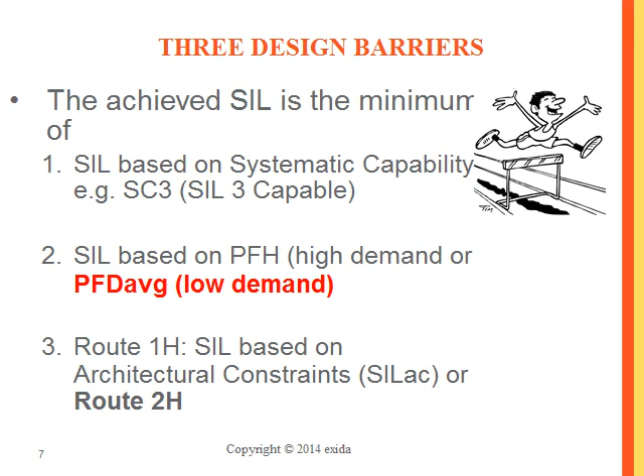Now, we will be looking at the probability calculation for the PFDavg in a low demand safety application where proof testing can be used. Okay? In calculating the PFDavg, there are 9 key variables to consider. The 9 variables are failure rates of each product, including the failure modes, and any diagnostics coverage from automatic diagnostics. And we're actually going to be touching a little bit about that. Redundancy of devices, including common cause failures.

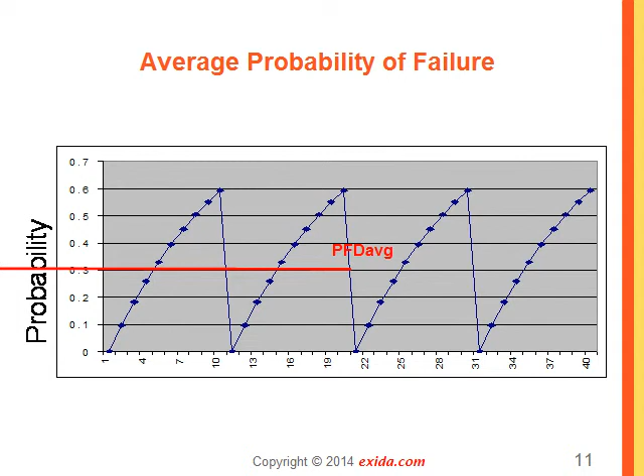When a condition or demand occurs infrequently and is an independent event, you really have no real knowledge of when it's going to occur. The average probability of failure is a valid way to represent failure to respond to a demand. Okay, so if you don't know where it's going to happen, you have to assume all points on the sawtooth graph and find the average, and that's where your PFD average is going to be. Okay?

Now, if I run a functional test and I see the system respond, do we know that everything we need to work really does work? Do we even care? If everything seems to work perfectly, is there a problem? I mean, we all say, this test seems perfect to me, and we move on, but really, is everything tested?

A proof test is done where, let's just say, a pressure sensor is isolated and pumped up such that the pressure sensor exceeds the trip point. The remote actuated valve is observed to verify that it moves, right? Well, let's ask the question again. Is everything tested?

Well, here's just 4 examples that I came up with that a proof test might not cover, that people might not think about. The valve seat, it may not seal properly. If the response time is not measured, component failure may be causing the speed of response to exceed the process safety time. Process connections to the sensor may be failed, or power supply, the droop wire resistance, may be limiting maximum current, disabling diagnostics alarms.

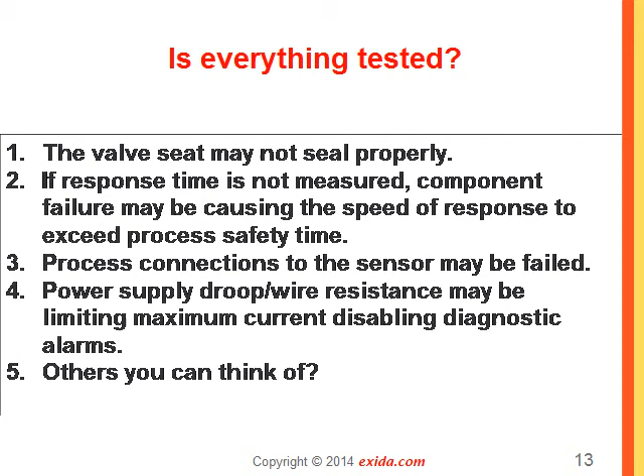And I listed 4 here. There's many more that I could probably list. But what are some others that you could think of? Are you really testing everything? Is it 100%?

Now let's take a look at an equation of a realistic proof test. Now here's a very simplified approximation showing that we have an estimate of proof test effectiveness, the CPT there. Once the time interval and the mission time are determined, you can begin your calculations.

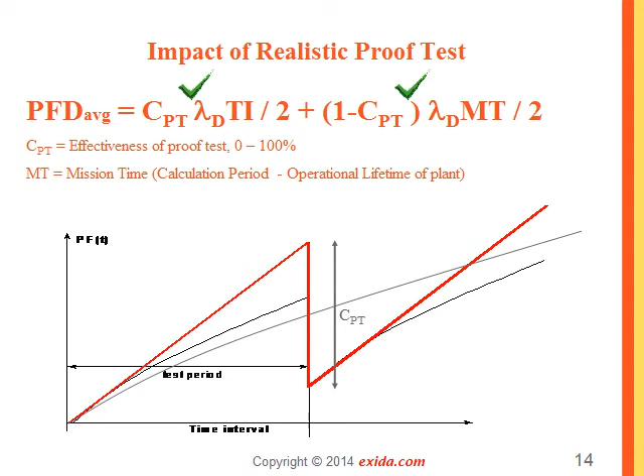The formula for the initial part of the equation, the λDU, this part simply gets divided into the part that's detected during the proof test, this first term. I'll put a little check mark here. And the part that's not detected in the proof test, which is over here. That's how you calculate the proof test. This approach gives you a good average over a given mission time. And like I said, we'll go into more details in the next coming slides.

Now, it can be clearly and definitively proven by an example that no real proof test is perfect. We have many examples of failures in products that cannot be detected by fundamentally simple functional proof testing. However, you will still find people that say, hey, if it works, it works.

It's surprising to see some of the proof tests and how minimal, rough, we can even say crude they are. Like the example I spoke about 2 slides ago, there was a basic proof test that instructed the user to put a block on a valve and, well, let's check to see if the valve attempts to move. The issue here, and we've talked about this before, you have no idea if that seat actually seals or not. This proof test is far from perfect. And yeah, that's a pretty basic example, but I'm just trying to build a picture here.

What happens if you have an imperfect proof test? What's it look like? Instead of taking the probability to 0 during each proof test, we can take it to some finite value above 0. Let's say, you know, right here.

As you can see, the probability grows and grows as a function of the number of proof test cycles, and in this case, is totally equivalent to mission time. So you can see here, as it grows. Okay? Now look at the black line, the PFDavg line. I'll put a little check mark there. That is for the number for just one cycle.

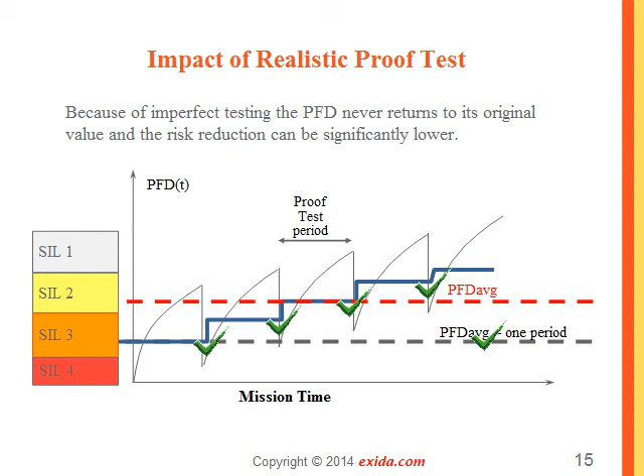Okay, as an example, let's consider a high-level protection safety function. The proposed design, let's say, has a SIL 2 target, and we've chosen a SIL 3 capable level transmitter. We've chosen a SIL 3 certified safety logic solver, and a single remote actuated valve consisting of a certified solenoid valve, a certified Scotch yoke actuator, and a certified ball valve.

Now, some people say, well, why did you choose all that certified stuff? Well, now we don't really have to worry about the systematic capabilities, for this example anyways. We're going to use exSILentia, the SIL verification tool, but we're going to enter variables that are very idealistic, okay? Which basically means very unrealistic. But just for this sake, let's just go through the example.

We're going to choose a mission time of 5 years, 1 year for the sensor and the final element. We'll have really good automatic diagnostics, we'll say. We'll do a 100% proof test, which is commonly used, but very unrealistic. And we will assume the proof test is done with the process offline. If it's not online, there can't be a PFD because, well, there can't be a demand. That eliminates the whole worrying about bypassing.

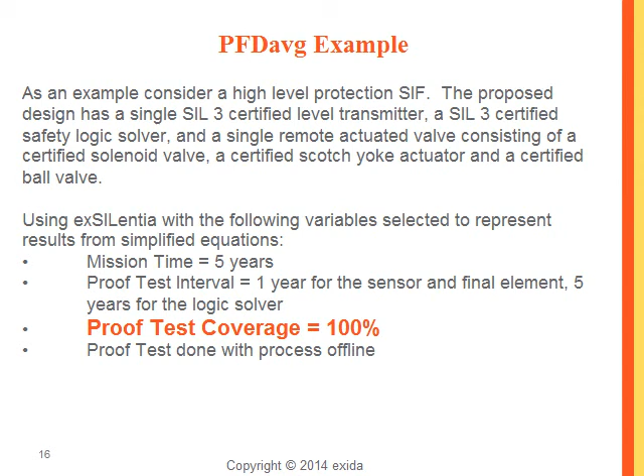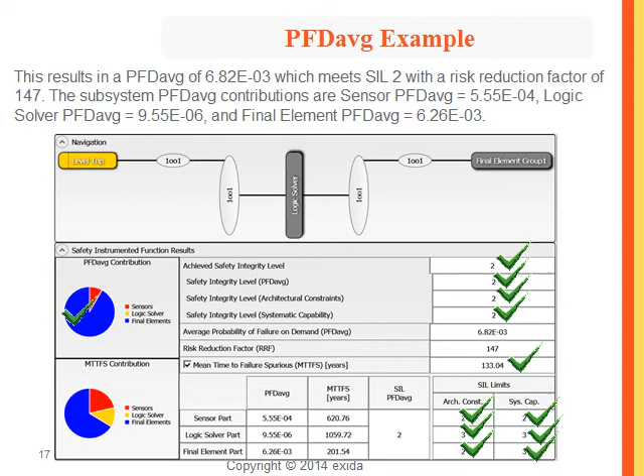The proof test interval will remain the same for the sensor. It'll remain the same for the final element, and it will remain the same for the logic solver. Now, the proof test coverage is important. We're going to say 90%, which is pretty good proof test for the sensor. We're going to say 70% for the final element, which can be a little optimistic if we were to say the final element was for a tight shutoff application. So let's say, for this example, it's not a tight shutoff application.

Okay. The proof test duration is now 2 hours. Most likely this should be a little higher with process online, but let's leave it at 2 hours for now. The MTTR, 48 hours, which seems reasonable. We feel within a 2-day span, if there's a holiday, someone can get over there and fix that. I think it'd be kind of unlikely to get anyone out there any sooner than that. And finally, the maintenance capability that we've chosen: we chose medium for the sensor and final element, and we chose good for the logic solver because logic solvers have been very reliable.

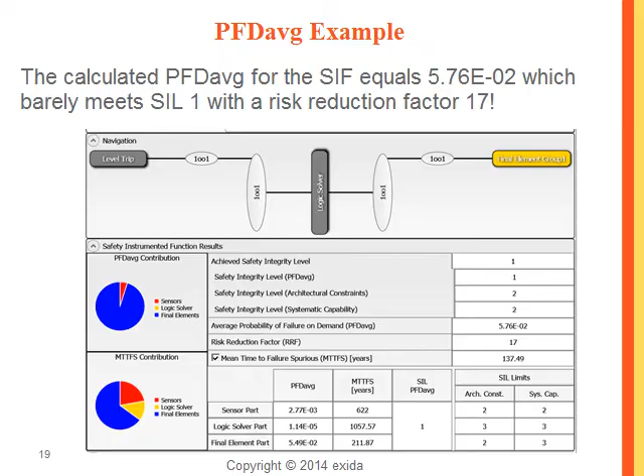Now that we've learned about how a realistic proof test can affect a product, how can we create an effective and realistic proof test? When creating a proof test, there are a few questions you must ask yourself. First one, how does this component failure impact the product? Is this failure detected by automatic diagnostics? If not, is this failure detected by the manual proof test? Once a proof test is created, now we need to figure out how do we measure the effectiveness of that proof test.

Proof test effectiveness is typically expressed as a percentage of DU failures in a product that are detected by a given proof test. Proof tests range from 0 to 100%, many of which are in the 40 to 90% range. Now, it should be understood that a manual proof test is done to detect failures not detected by automatic diagnostics. Now, tests designed to detect the same failures as the automatic diagnostics, what does that do? That just really consumes time, it increases costs, and accomplishes very little.

Here's an important note. I'm going to start talking about a few things that these past 2 months, many questions have been brought up, and that's actually what geared us towards this webinar, because we're trying to bring an awareness here. As automatic diagnostics get better, manual proof test coverages go down. This is good. Let me read that again. As your automatic diagnostics get better, manual proof test coverages go down. Okay. This is good. Why? Because the total detected DU failures, those that are detected by the automatic and manual testing, they increase. Because they increase, meaning they're detected, the PFDavg drops.

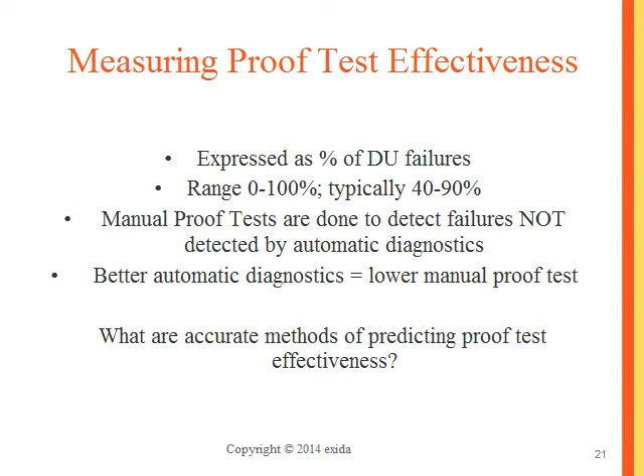Okay, so here we go. Pretty basic example, but it makes a really big point. Product 1 and Product 2 both have 100 fits of dangerous failures, and both use the exact same proof test.

Product 1 has poor automatic diagnostics with a proof test coverage of, say, 80%. Sounds great, right? 80%, hey, that's not too bad, that's respectable. Product 2 now has good automatic diagnostics with a proof test coverage of 20%.

Now, many people, if I say your proof test coverage is 20%, they get upset, they get mad. This seems really low. But which product is safer? Which is more reliable? Which product would you purchase? Some of our customers are looking for 100% proof test coverage. This is where we need to tell them and show them these examples.

Let's look at the left column only. The proof test coverage is a measure of how many undetected dangerous failures are detected by that proof test. Product 1 has 100 fits of dangerous failures.

The automatic diagnostic support detects 10 of the fits. Lambda DD equals 10 fits, lambda DU equals 90 fits. For our example, the manual proof test can detect 72 of these 90 fits. The proof test coverage now, 72 over 90, is 80% proof test coverage. Hey, not bad.

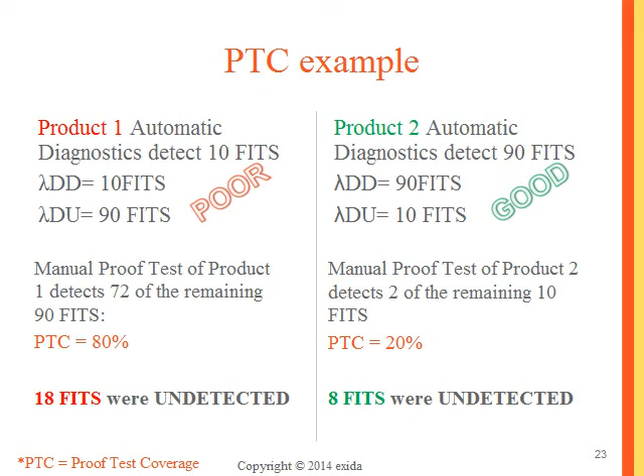So when someone asks, hey, I want this product, but I want 95% proof test coverage, do they really know what they're asking for? Do they look into what that product has for automatic diagnostics? When we look at different proof test coverages, we can actually sometimes find the opposite is true, that the lower proof test coverage is the better product. Not in all situations, but we just want to make sure people can see how this can be.

And here's a little summary, right? So a realistic PFDavg calculation depends on several variables, as you saw, including the proof test coverage. Last week at the webinar, Dr. Goble went into great depth with the different variables.

The second thing is the proof test coverage can impact PFDavg by an entire SIL level, so keep that in mind depending on how you enter your information. Be careful. Proof test coverage also can be measured by a detailed examination of the product.

Now, many people basically ask, well, how do I come up with my proof test coverage? How do I know what my percentage is? Well, it really all starts from performing an FMEDA.

And using the commercial SIF verification tools, these have databases of proof test coverage already built in. There are also generic books that are published that can give you a starting point for what a proof test coverage would give you depending on your certain situation.